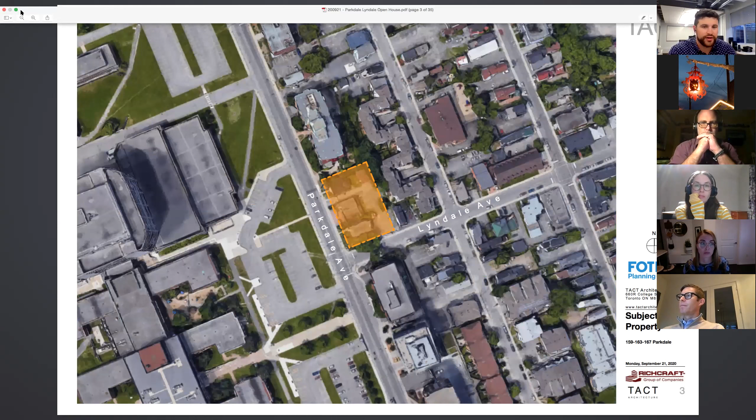Just looking at the existing context of the site, it's at the northeast corner of Parkdale and Lyndale Avenue in the Mechanicsville neighborhood. Just to the west is the Tunney's Pasture federal employment node, and it's roughly about 400 meters from the Tunney's Pasture transit station. So the current aerial imagery actually shows 3 buildings, but what's actually on the site now is a vacant lot. Those buildings have been demolished.

You really see a variety of built form in this area. You have quite a few mid to high rise buildings, whether it's residential along or near Parkdale to the north and south of the site, as well as to the west, you have some federal office buildings that are quite tall as well. To the east, you have a little bit more of a stable, low rise neighborhood that is really the center, the heart of Mechanicsville.

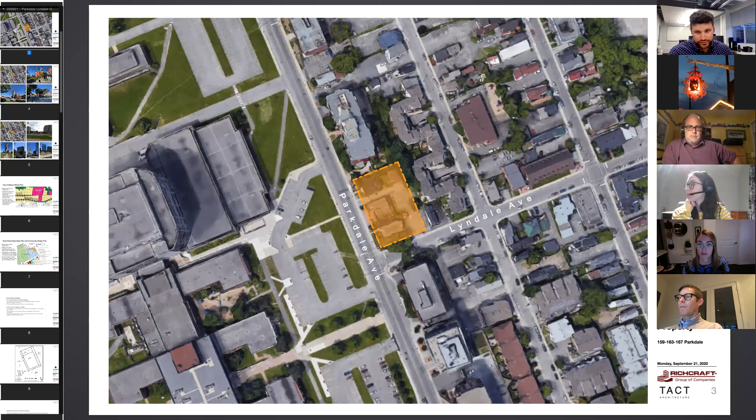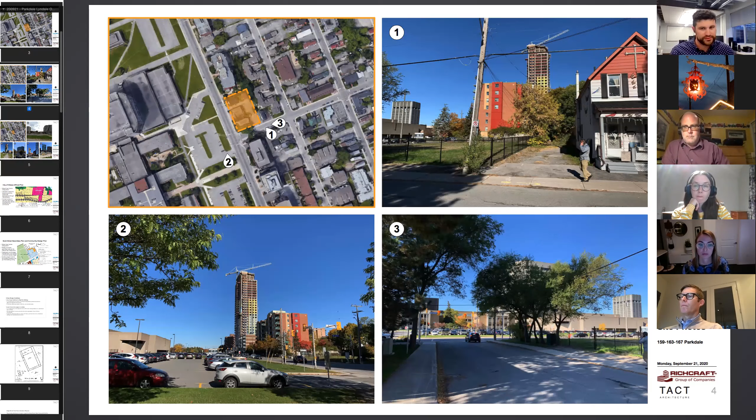So just looking at a few site photos, there's just a few examples of existing or planned high-rise developments, including on the next slide. It just goes to show that what we're proposing is not necessarily out of context with the rest of the neighborhood. This will not be the first high-rise development in this area.

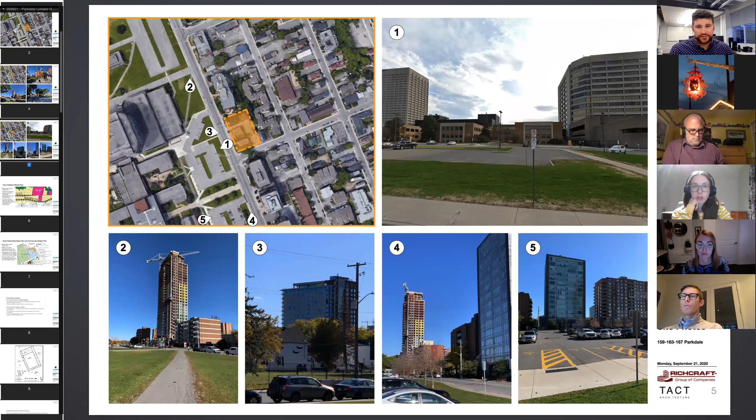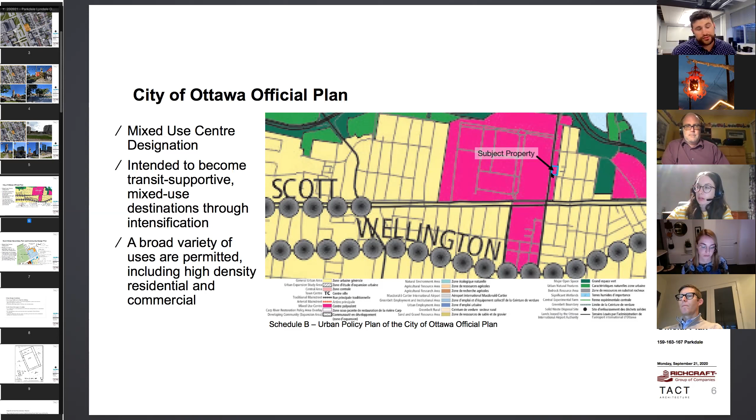In terms of the existing context, looking at the official plan, it's designated mixed-use center, and you see that usually near rapid transit stations. It's really to encourage these areas to become transit-supportive mixed-use destinations. So they often advocate and encourage for a higher density and a greater mix of uses, and they do often encourage intensification. In mixed-use centers, a broad variety of uses are permitted, including the ones that we'll be proposing, which is a high-rise residential building, as well as some commercial ground floor space. Again, it does promote high densities in this area.

With respect to the Scott Street Secondary Plan and Community Design Plan, again, mixed-use center designation advocates for a mix of uses and a pretty high density in this area.

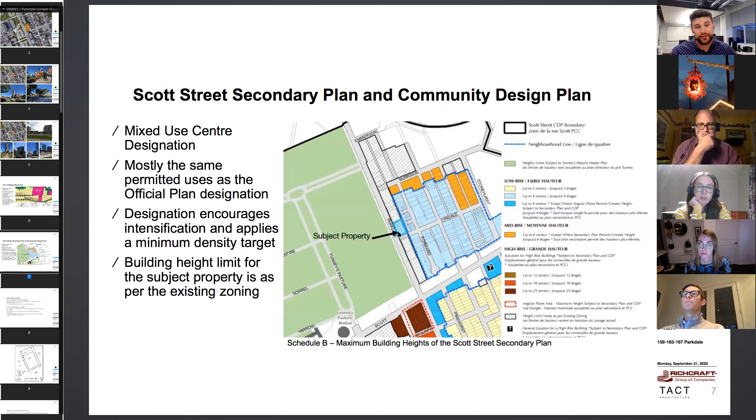It does include some minimum density targets. Just to note, the building height limit for the subject property, the secondary plan does speak to this, but it only says that for this property it is as per the existing zoning, which we'll note in a couple of slides. We've had regard for a variety of urban design guidelines to make this building as appropriate as possible for the site and surrounding context.

This includes some design guidelines in the community design plan, as well as other guidelines issued by the city, such as urban design guidelines for high-rise buildings, as well as transit-oriented development guidelines that speak to a variety of considerations we've tried to incorporate in this building design.

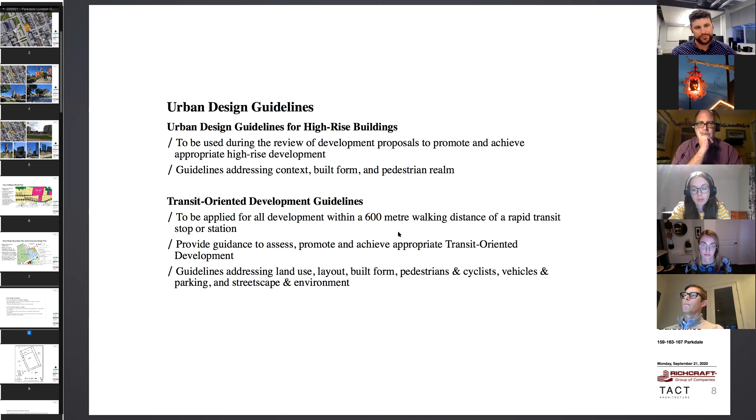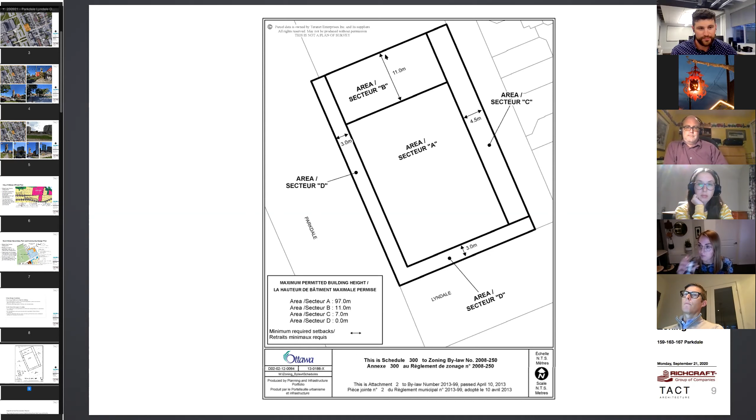Area B, which is 11 meters wide, you can only build up to 11 meters in height, so as to give some separation between the proposed tower on this building and the 8-story apartment building just to the north. We've also gone through the Urban Design Review Panel.

This is a group of architects who evaluate important development proposals for their design in the city of Ottawa. We've already gone through an evolution of the design. And as Councillor Leiper has mentioned, this is a site plan control application, so we're really going through the nitty-gritty details of this development proposal.

We submitted back in July and just received comments back from the city, a first round of comments. Over the next few months, just to give everyone an idea in terms of timeline, we'll be working with the city to resolve all of those remaining comments. Once those are resolved and we're able to enter into an agreement with the city, then at that time Richcraft will be able to get some building permits issued in order to construct the building.

So that's kind of where we're at in terms of the policy. Again, we're meeting all of the policy and zoning that currently applies to the site. This is strictly a site plan proposal. So with that in mind, I'll pass it off to Prish to speak a little bit more to the building design.

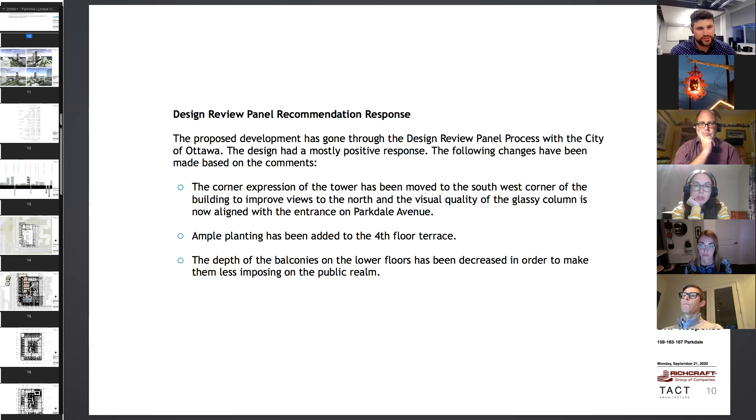Thank you, Nico. Thank you, Councillor, and thank you to the residents that are here tonight. I'm going to go fairly in detail, but fairly quickly. If I've left anything out, please ask me during the Q&A at the end of the session. My name is Prish Jain, I'm the principal of Tact Architecture.

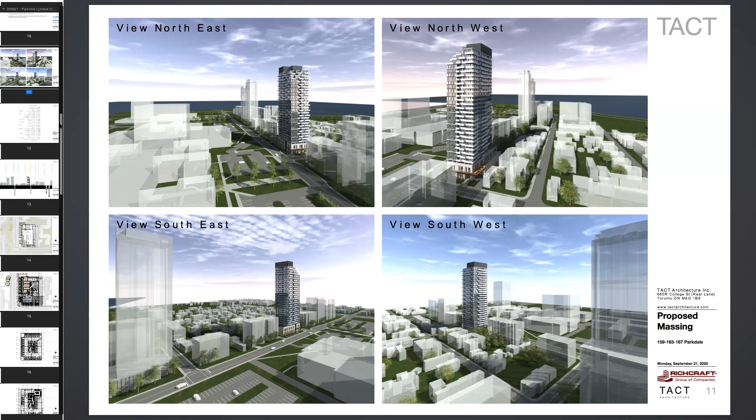We're a firm that specializes and focuses exclusively on residential, mid-rise, and high-rise buildings. We've won numerous awards, and this is our third project in Ottawa. We also did the Minto Beechwood project that finished about a year and a half ago.

This first slide shows typical views we prepare to provide a general context of the building from all four different angles. Top left is a view looking towards the northeast. Parkdale is in the foreground, Lyndale is here, the river being at the top towards the north. Top right, this is a view looking northwest, Lyndale in your foreground. Bottom left, this is a view looking southeast.

This is Parkdale, existing building under construction, nearly complete, Lyndale along here, and then Scott Street back here. Bottom right, a view looking southwest, existing building again nearing completion on the right, and then Parkdale behind the buildings in the mid-ground.

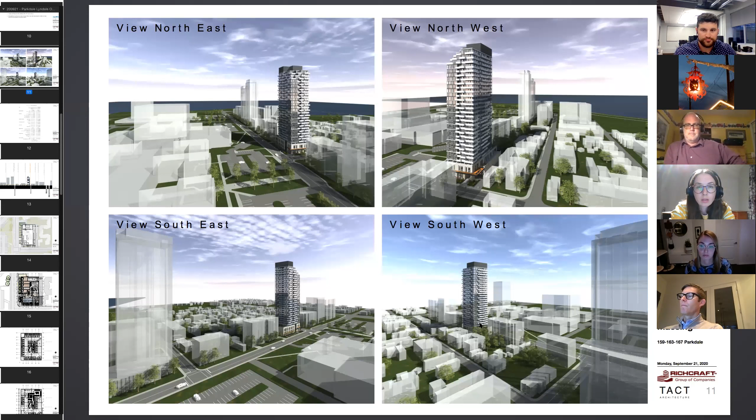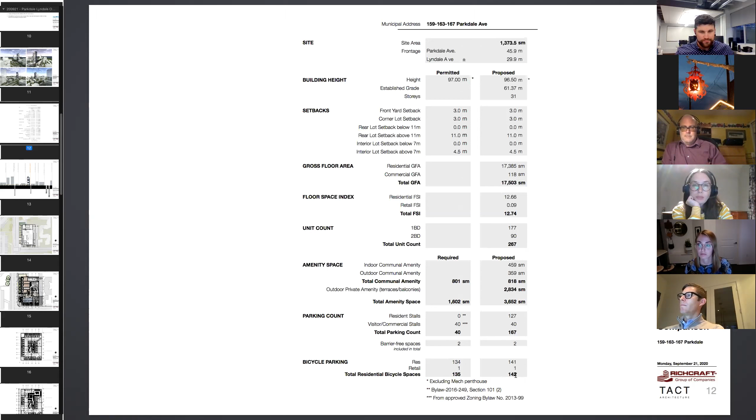I don't mean to go over too quickly, but I will come back to this if anyone has further questions. Moving along, this is a streetscape diagram that we typically prepare.

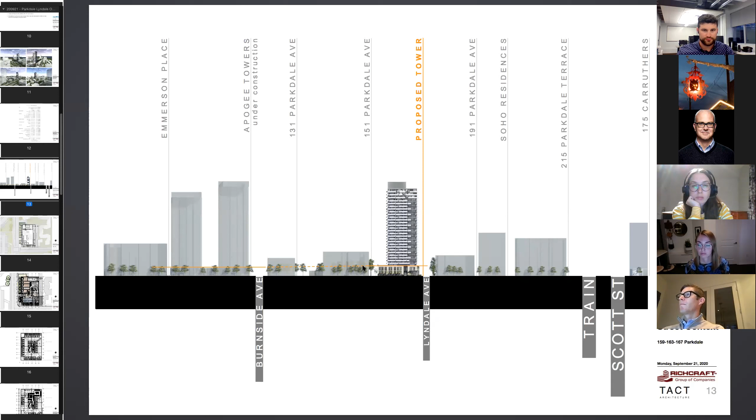This is showing a streetscape along Parkdale looking east. Scott Street would be here, the new train station, the train line along here, and the existing buildings shown in gray. The proposal shows new buildings under construction, and the orange line stipulates a new datum, or podium height wall, to which existing and proposed buildings are to conform.

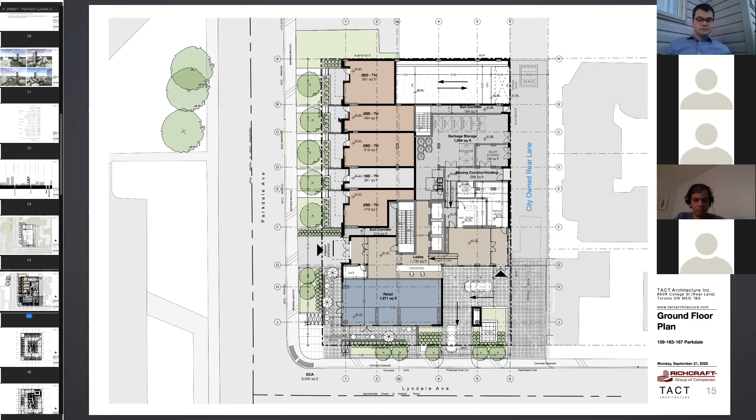There's a private terrace, a planter, then a boulevard, and then the sidewalk, with privacy and a grade change between the sidewalk and the private terraces. Moving further south, this is a pedestrian entrance into the lobby from Parkdale Avenue. At the corner is approximately 1,300 square feet of retail space with an adjacent patio towards the west and south. The retail space can spill out onto the patio, which is buffered by a landscaped area, then the sidewalk, then the street.

Similarly, on Lyndale there's retail, then a patio, a planted area, the sidewalk, and the street. Moving further around the building, there is access into the city-owned public lane. From that lane, there is a single one-way access around for vehicles to drop off and pick up.

This works through an additional through-lobby condition—a double height glass space. Pedestrians can walk in from one side, or through a vestibule as they're dropped off or picked up. They can walk through the vestibule and into the lobby from the rear of the building as well. A concierge sits in the middle, with eyes on the rear, the front, and the center portion of the building.

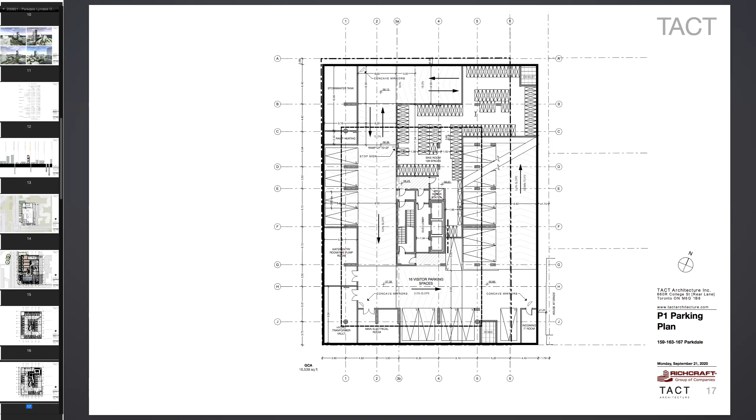The P1 level has all of the bicycle parking accommodated at a very convenient location near the bottom of the ramp. It also has all of your mechanical areas, stormwater tanks, fire and water pump rooms, transformer vaults, electrical rooms, and IT rooms. So P1 level is generally less efficient in terms of parking, but that's because it accommodates many other uses that are required to be as close and easily accessible by the occupants as possible.

Moving up the building, second floor. These are the upper levels of the grade-related two-story suites. These two-story suites also have access from within the building, from the second level, accessed by the elevators and through a corridor.

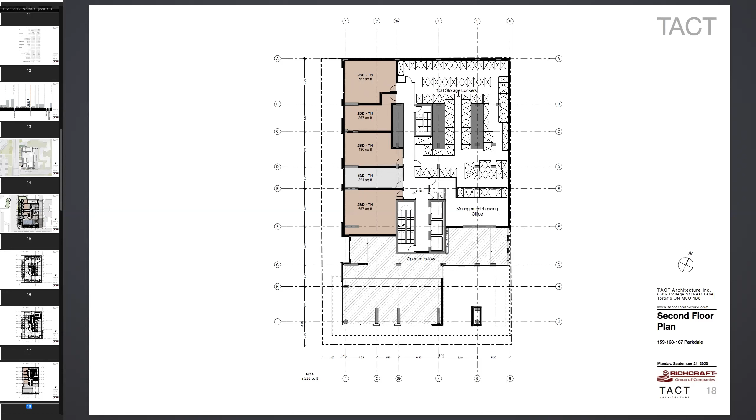What's also located on this floor, as a requirement, are storage lockers. These are separate from bicycle storage, for occupants and residents of the building. The area shown here with the angled lines is a double height space, open to below. This is the lobby area, which is glass on both sides and around the corner. And then this is the retail space, which is also a double height space. I'm going to have some images to show you in a few slides.

This is the fourth floor, and this floor is entirely dedicated to amenity space. This floor is set in from the podium below on all three sides - set in from Parkdale, from Lyndale, and from the east. On the north side, the outdoor amenity area is located contiguous to the indoor amenity area.

The programming and design of all of this amenity area is still being resolved and fine-tuned, but the amount and location of the amenity area is as we are showing it here. There's a pool, some outdoor seating areas, lounge chairs, and all access directly to the interior area via a series of doors or connections that would bring it into the inside areas.

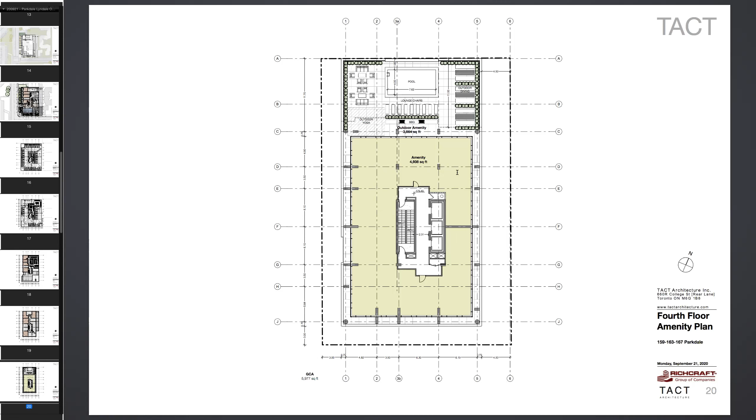Now, the top three levels are what we're calling the penthouse levels. The building on the top three levels starts to step back at the southwest corner, creating a terracing condition, which I'm going to show you in a minute, in terms of how the building recedes and steps away from the corner as it gets to the mechanical penthouse.

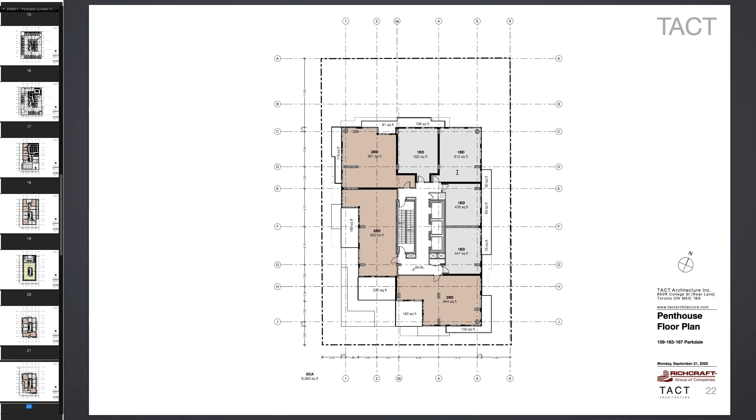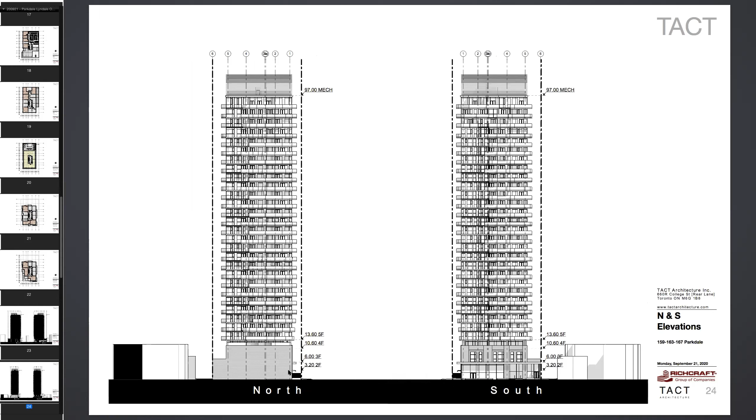North and south elevations. Again, here you see the height restrictions for different components as per the height map and as per the zoning that was previously approved. All of this conforms to that zoning approval from many years ago.

This is a more detailed elevation along Parkdale, showing the materials and coloration of those materials as well as we can do it at this early stage. We are showing here a raised private planting, a raised private patio area separated by a planter, separated by a metal gate for each individual entry for these 2-story suites. There would be a wood or wood-look canopy located more intimately closer to the ground plane at this location.

The third level, which would be here, this is the pedestrian entrance to the lobby. And then this is the double height retail space with the patios spilling out on the west and on the south side.

In terms of what the glass railings are made out of, although they look very solid here, it's hard to emulate what it is exactly that we're trying to show, but these are actually glass balconies that have a fritted pattern on it. This fritted pattern will obscure whatever is placed on the balcony, so people from the street will not be able to see it, and it also creates some privacy for the occupants within the building as well.

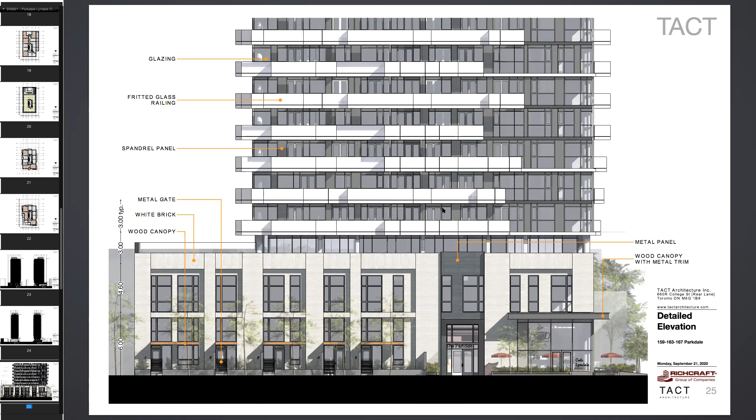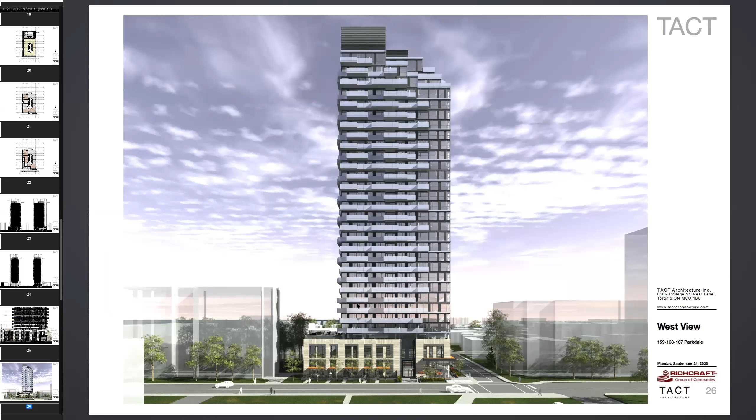A view zoomed back further, showing the entire building. Here you see how the top 3 stories step away as you get taller, moving further from the south and ending in a mechanical rooftop, where we like to incorporate the mechanical design as part of the building instead of just adding it to the top. Here you see the outdoor amenity area located at the north side of the building.

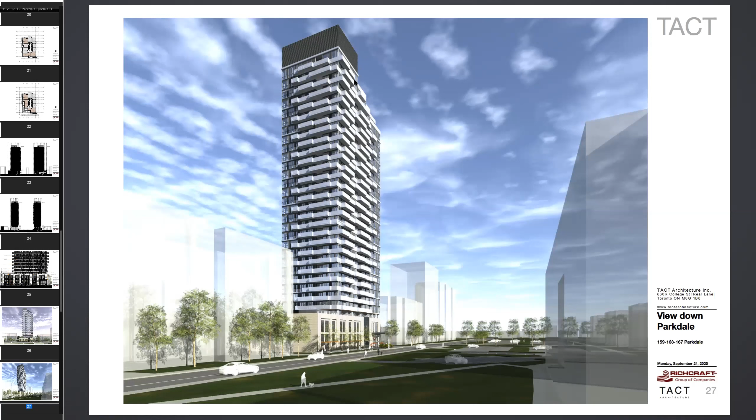Another view looking southeast, with Parkdale in the foreground. We're trying to create a very rhythmic pattern of fritted glass balconies so that the building is more articulate than normally. Again, the building steps back from the south side as it gets to the top.

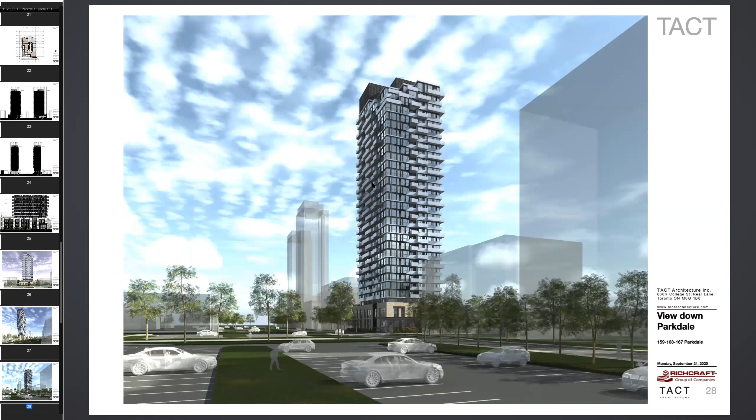View looking northeast. Here again, you see the 2-story retail space at the bottom of the building. One comment from the Urban Design Review Panel was that previously we had balconies on this corner, and the panel suggested this corner be free of balconies, with the balconies placed elsewhere, in order to lighten the corner up for the podium from a street scale perspective.

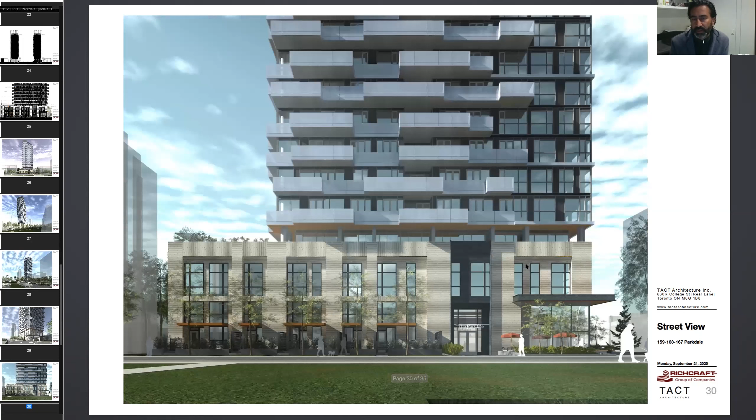Another view of Parkdale, looking south. This is a view along Lyndale. This is the access to the public lane, and then the drop-off pickup area.

Another pedestrian door for the drop-off pickup area leads to a vestibule, leading into a lobby. Drop-off pickup vehicles will then exit back onto Lyndale in a one-way direction and then back out onto Parkdale or to the other side.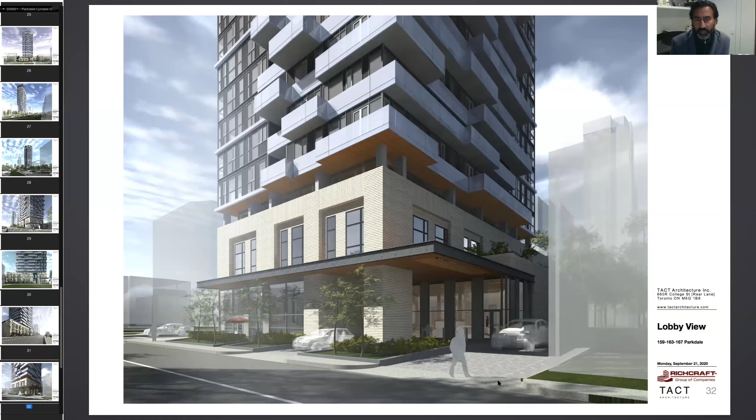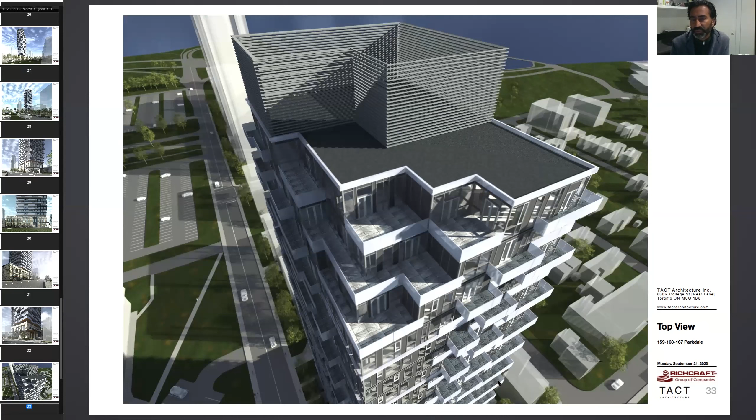I think this is the last slide. The top of the building, again, showing the articulation as the building recedes up towards the horizon. It starts to step back towards the mechanical space.

This is a section taken through a typical condition: Parkdale, the sidewalk, the walkway or planter, a few steps, a private planter, a terrace area, a front door, and then the two-story suite.

So again, that's shown here. This shows how the front door is not at the level of the sidewalk. It's slightly raised, very comfortable, 2 or 3 steps, but there's also internal access for this two-story suite located off the corridor from the 2nd floor.

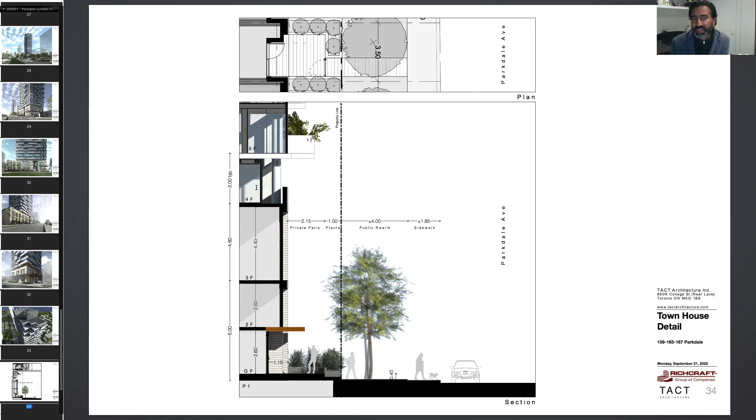The amenity space located here on the 4th level, again, recessed in from the face of the podium and the face of the tower.

That's it. Thank you. And I need a glass of water.

Okay, yes, so for context, I live across the street, so I'm quite concerned about traffic and trucks and cars and whatnot. My question is, where are the moving trucks, delivery trucks, any type of vehicle going to be situated for move-ins, move-outs, deliveries, etc., considering that Lyndale has zero room for any of that right now.

Similarly, somebody is going to ask about how garbage is handled, and I didn't address that in my presentation. All the garbage for the building is collected and stored internal to the building. On garbage day, trucks would stop on Lyndale, bins would be rolled out in advance at the end of the lane, garbage bins would be picked up, and then the bins would be rolled back and stored internally. Bins are never expected to be located outside on any permanent basis.

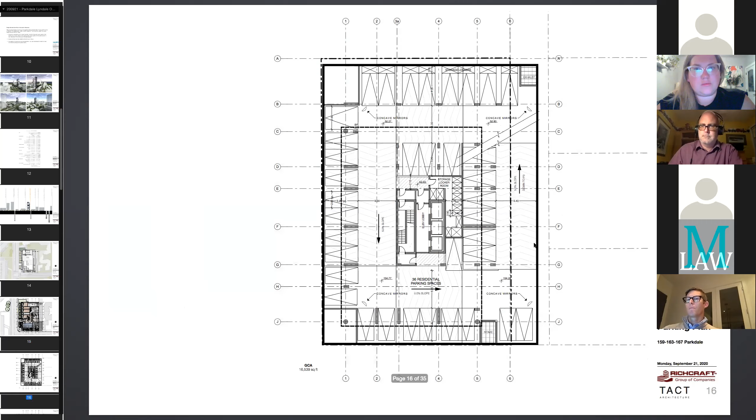Okay, next question from Vicky. We talked a little bit about construction, but do you have any high level idea when you might start construction?

Kevin, do you want to address that one? Yeah, sure. Ideally we'd like to go through this site plan process and complete it this year. In the meantime, there's a lot of coordination with neighbors, the architect, working drawings and details, as well as utilities, specifically hydro. So there's several issues to work through, but the ideal time for construction would probably be May or June next year.

The duration for a building like this would typically be about 2 years or so, maybe a bit longer. Prish, you might have a better idea of this scale of building. We've built buildings of this size when it comes to units and square footage, but we've never gone to 30 stories before. So Prish, maybe you can talk about your estimate of timing for construction?

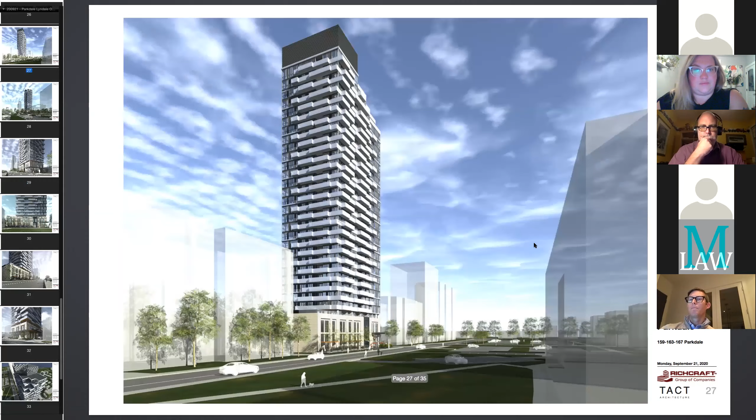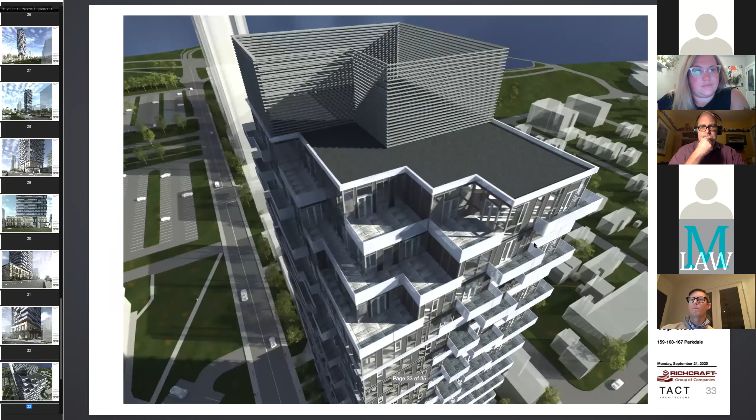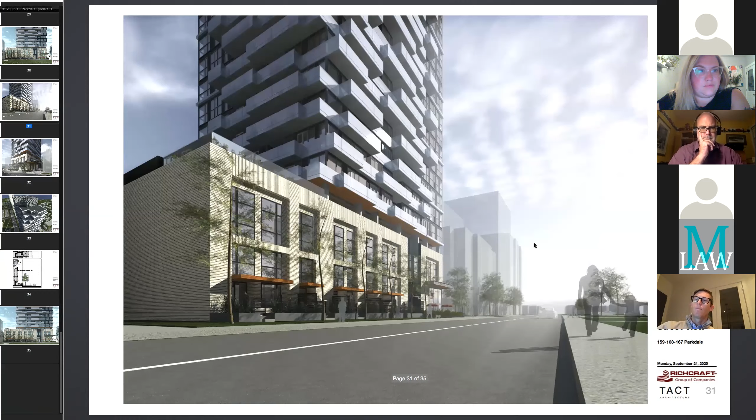So this area here, even though 4 meters of it has a below grade component, I would estimate there would be some requirement for closure along Lyndale, or at least along Lyndale, and maybe even both Lyndale and Parkdale. But I'm not the expert in construction staging. Once you get out of the ground and the ground floor slab is poured, the 6 meter wide area of the lane can be utilized for deliveries and staging, taking the onus off of Parkdale and/or Lyndale upon completion of the below grade component.

Yeah, getting out of the ground is the most difficult. Once the project emerges out of the ground, the next most difficult is the podium, from 1 to 4. Then once you get to the 5th floor and up, it will be smoother sailing all the way up to the top penthouse levels of the building.

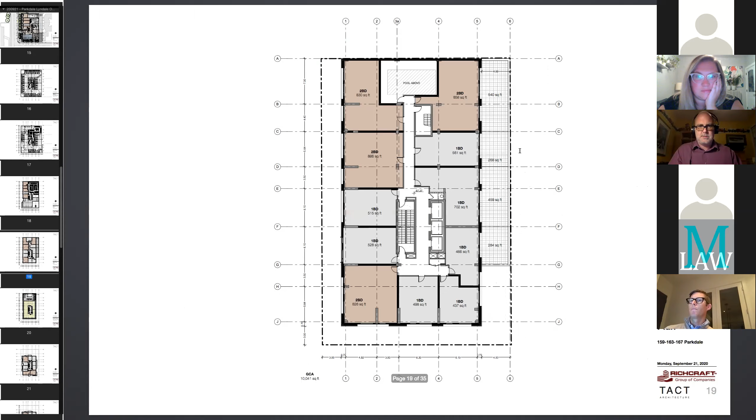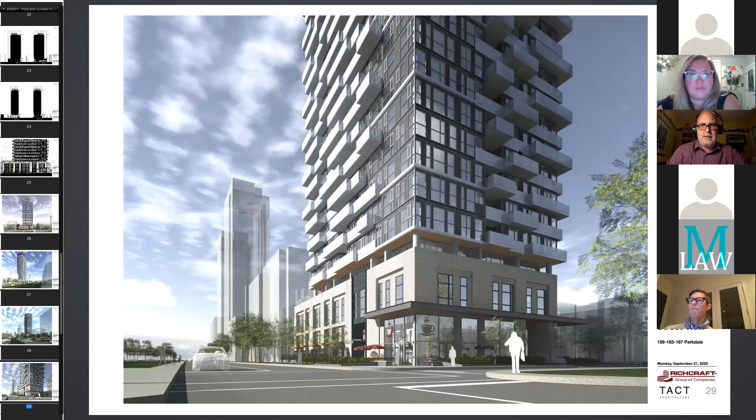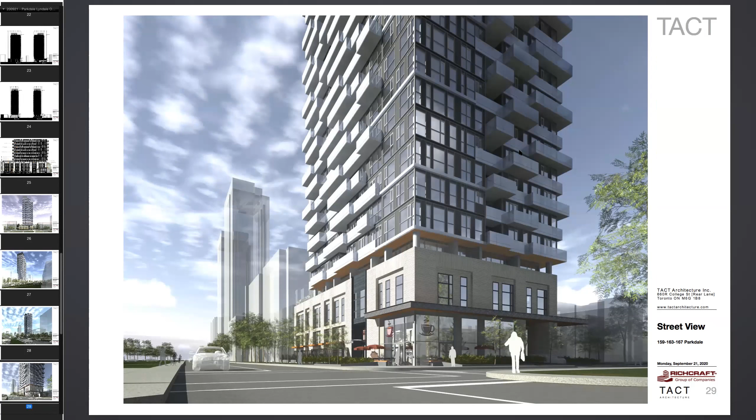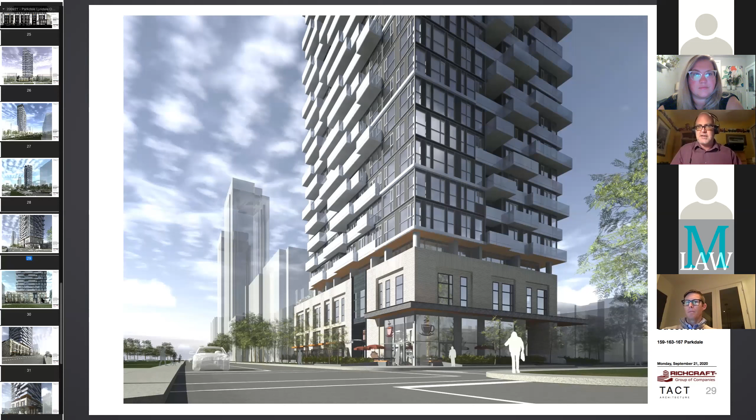There we go, that's great. So, and I'm sorry, I'm not an architect, obviously, but this is a little better looking than most of the buildings being proposed for particularly Scott Street. I know at the last planning committee meeting we had a discussion about the building on Albert, Claridge's building, I think. It kind of wowed the planning committee with respect to the more distinctive architecture. We raised the Claridge building as something that was shown really distinctive, and then became something less distinctive once it was actually built.

On Albert, the planners were able to describe what made the building distinctive. I think they spoke to the curvilinear windows and stuff like that, and they hinged the site plan to that. They actually hinged the zoning to that, but they wanted to see a site plan that had the same features in it. I'm wondering what kind of commitment you can make, and maybe Jenny can weigh in with respect to site plan conditions that speak to this better architecture than what we've been seeing in the neighborhood. Forgive me if that's convoluted, I'm just not sure quite how to pose that. Is there a way to describe what we like about this architecture and then make sure that's what gets built?

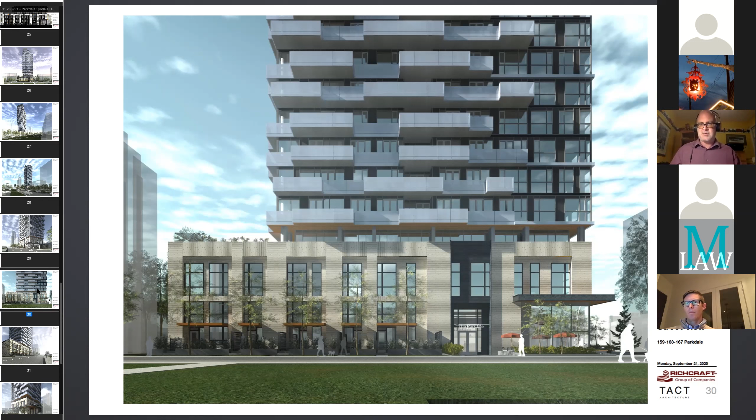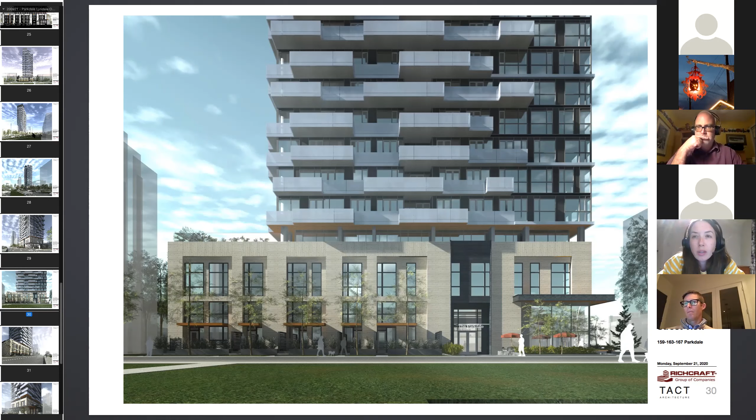I mean, typically we tie the approval to the elevations that we approve. In this case, I think the file you're referring to is Andrew McCreight's, so I can have a discussion with him to see what he's doing with that one.

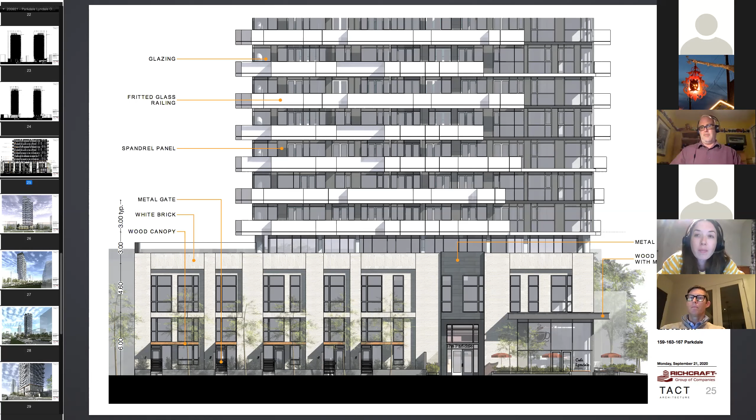Okay, and maybe we can do the same thing here. There's some interesting variation around it, and I just think it's a little funkier looking than most of the buildings. Yeah, I mean, we'd also have to work with Richcraft, because sometimes when they value engineer stuff it just becomes not feasible. So I'm hoping Kevin will agree to work with us maybe on a condition like that, so it doesn't get value engineered away.

I can just make a small comment on that as well. Because our firm focuses almost exclusively on residential architecture, I can say with confidence that all residential condominium driven buildings are always about the bottom line. Our mandate in our studio is to make sure the buildings we design aren't dressed up just to make them look attractive at the outset. We consider cost as we design, and we try to design as effectively and efficiently as possible from the get-go. So I'm not saying value engineering isn't a reality, it always happens, but we challenge ourselves to come up with a design that will be hard to value engineer. That's really our mandate, and it's proven successful for other projects we've completed, dozens and dozens, many of which we've won awards for, including OAA Design Excellence Awards. So we're confident that the combination of our design and Richcraft's reputation means this project will deliver.

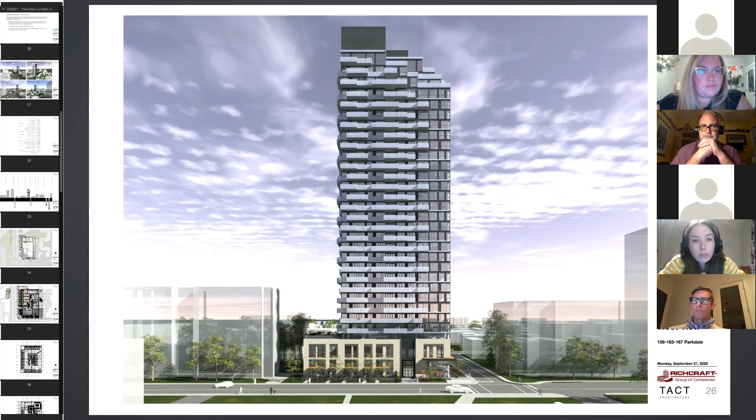I can answer, I could probably talk about aspects of both questions. First, with regards to the trees on the lane, I believe you're talking about the trees currently located in the 6-meter lane portion. The reason they're not in the report is because they're on city-owned property, within that 6-meter laneway area from this property line to this property line. So that's likely why they're not in the report. All the trees within the property owned by Richcraft would be within the report.

With regards to the venting and the exhaust, it's perhaps not an answer that people want to hear, but having designed dozens of buildings in urban areas, this is what laneways are for. You cannot exhaust, you cannot use the front of the building either on Parkdale or on Lyndale to perform functional or mechanical type requirements, because those are the public faces of those buildings. Laneways are for servicing the building. They are for access, for utilities, for mechanical. That's what they're there for. 6 meters is a 20-foot separation. It's quite typical even in the city of Toronto.

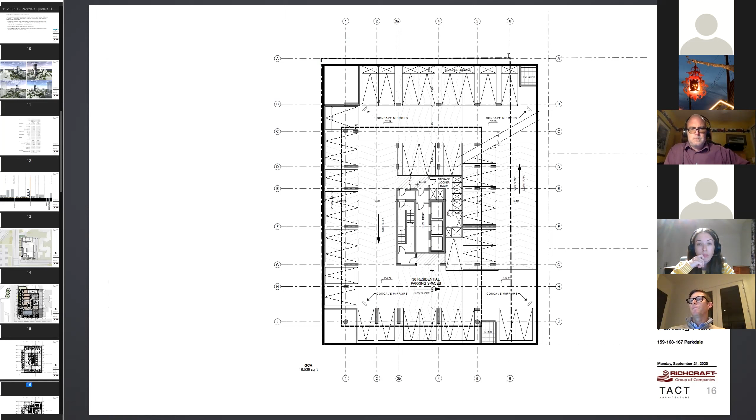And then how many levels of below-ground parking will there be, and number of cars per level? So I can answer that. There are a total of 167 parking spaces spread across 5 levels. 4 of those levels are typical parking floors that look like this, and I don't know the exact count, but 36 parking spaces per level on 4 levels. Then on 1 level, which is the P1 level, there are fewer, there's 16. So 5 levels total, 36 on 4 of them and 16 on 1, and that includes the barrier-free spaces as well.

Okay, thank you, next question in the queue. I note that your plan values privacy to townhomes in Parkdale by adding trees, but how about saving privacy of Muse residents with existing laneway trees on the east side? Is there a precedent for cities selling out laneways to developers?

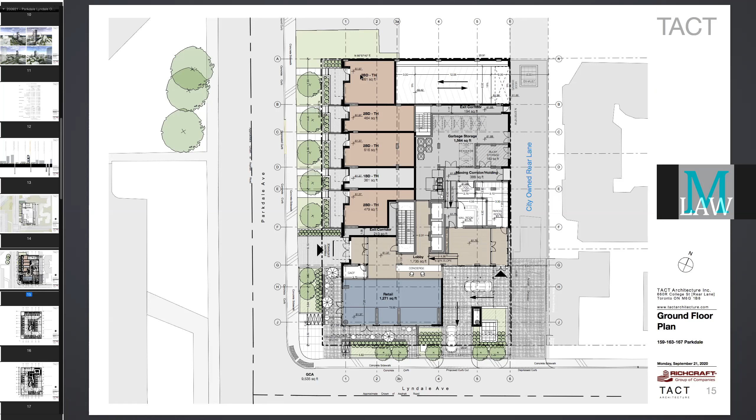You might be muted. He's unmuted, but we can't hear you. Joshua Foster, that's who it is. Yeah, we can't hear them. Yeah, it is Josh Foster. So if there's an audio problem, then Prish, why don't you go ahead and say what you were going to say?

I was going to speak to the exhaust. The parking garage is required to have an intake and an outtake for air. And the intake and outtake, they don't run continuously. They're on either a timer or they're on a device that measures the air quality and moves the air accordingly. So it's not a condition that is on continuously. It's a condition based on how much the parking garage is used.

So let's say during the peak morning or the peak evening, that's when the exhaust or the airflow will be at its peak. During the night and or during the day when there's less movement within the garage, there's less reason for the airflow equipment to kick on. So that's my non-engineer answer with regards to airflow, intake, and exhaust.

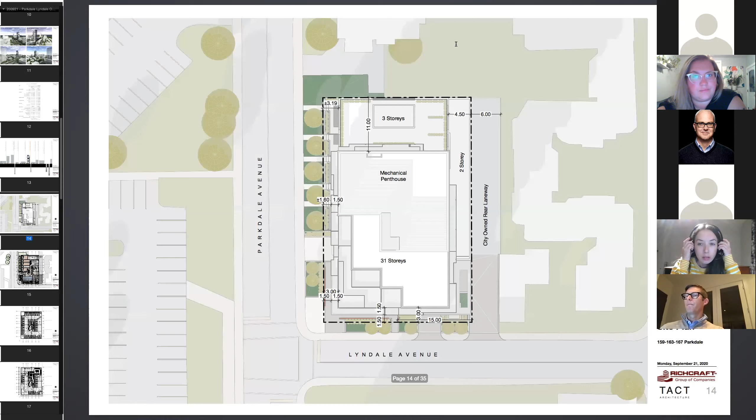My understanding is that there's 40 visitor parking spots, and they're going to be in the underground parking. That's in conformance with bylaw and typical of the city of Ottawa for these types of buildings.

I was just taking a closer look. The visitor parking is typically located in the most convenient location, which is as soon as you drive in, below grade. You can see them if you look carefully on the drawings - there's a V indicated on the parking spots, V for visitor. Wherever the visitor parking ends and the residential parking starts, there would be a security arm requiring a fob to access further into the lower levels. Typically, visitor parking is required to be as close to the bottom of the ramp and as conveniently located as possible. In this case, it's in P1 and likely P2 as well.

If I may add to what Prish and Andrew have said, the way the bylaw is written for this particular development, it will permit the visitor parking to also be used for parking for any commercial space located on the ground floor of the development. So the visitor parking would have two functions - for visitors as well as for users of the commercial space if they're coming by car.

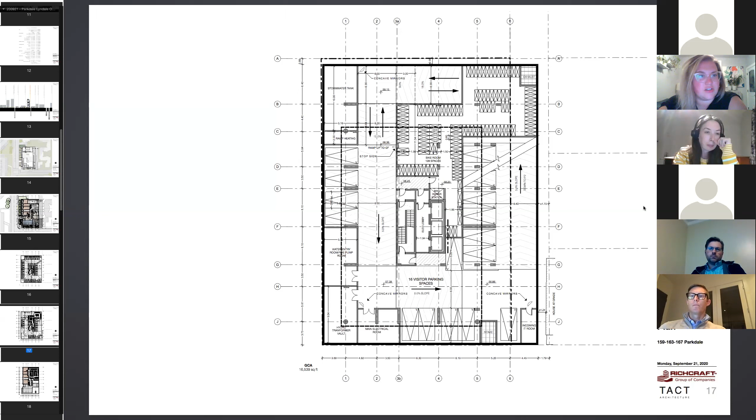With the significant increase in 1-bedroom units over the original designs, under current bylaws, can these units be used as investment properties for use as Airbnbs, which could increase noise and traffic?

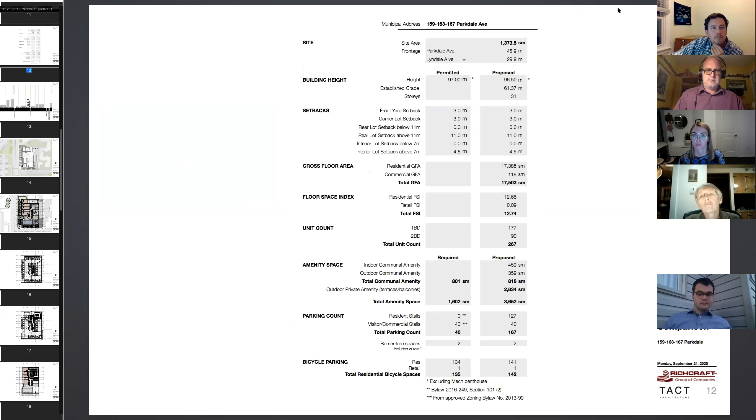I don't know where Jeff went. I don't know if he wants to comment on that or if the developer does. I am here - hey Fiona, I just turned the mute off.

It's a good question, but I don't know the answer. I don't know if Airbnbs cause extra noise or not. I don't know if Richcraft is going to own and rent all of these units, or if a purchaser is going to buy it and move in, or buy it and rent it out. These are strictly legal issues that the city can't necessarily police, but these are kind of beyond the scope of discussions for approving residential units. We're not necessarily here to discuss the end user, although maybe somebody has had a bad experience - you can't use that to paint every scenario the same way. So I can't answer that. And if the councillor wants to enact some sort of restrictions on the end user, he would have to have some sort of powers to do so, and I'm not sure exactly what those are.

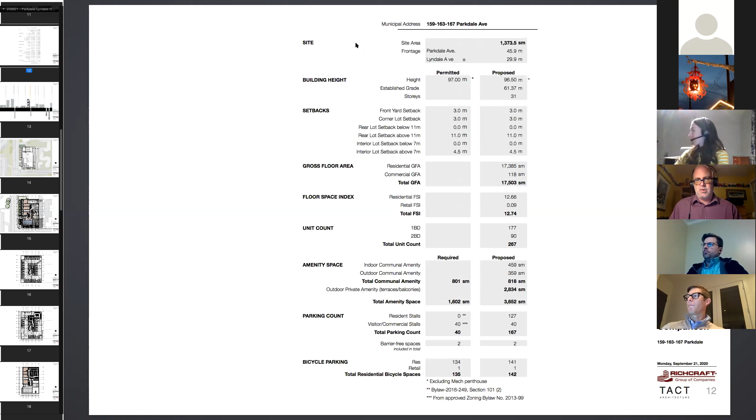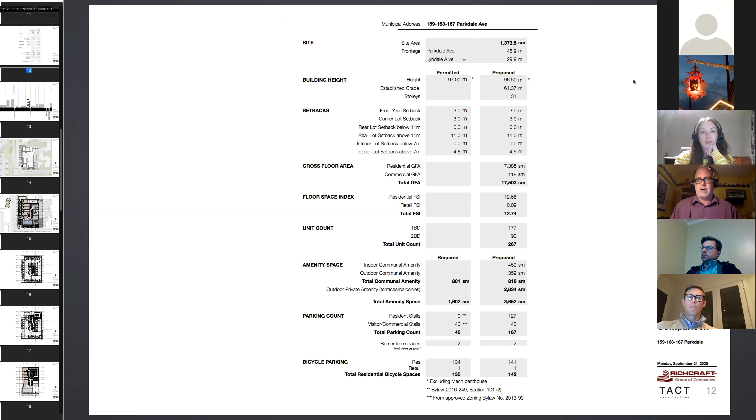Airbnb is now on the verge of being regulated in the city. But my understanding of what we did - I have to apologize to Cheryl particularly - they're not allowed unless it is your primary residence in residential zones. Is this an MC or a TM or an R zoning? I'm sorry, I should know that. The zoning here, councillor, is MC. So in the MC zone, we'd have to look at the specific MC to see whether or not hotel is a permitted use. If hotel is a permitted use, then the people who own these units could rent them out on Airbnb under the regulations that are coming forward. COVID has thrown a wrench in the works, but within months we would have to take a look at the particular MC zone this one is and see whether or not hotel is a permitted use.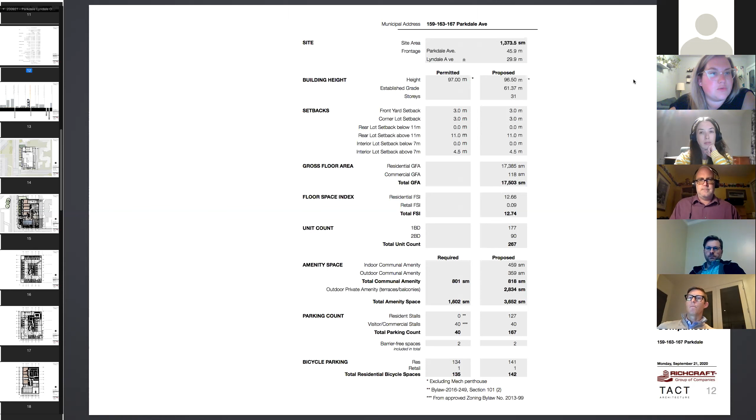Okay, thank you. Lyndale is often down to 1 lane in the winter and the sidewalks impassable, with wheelchair users forced to use the street to get to and from Parkdale. There are many mobility device users in this area. What is the developer going to do to minimize access issues on Lyndale during construction, particularly in the winter? Is there a plan in place with the city to address the snow issues once there are hundreds of new residents?

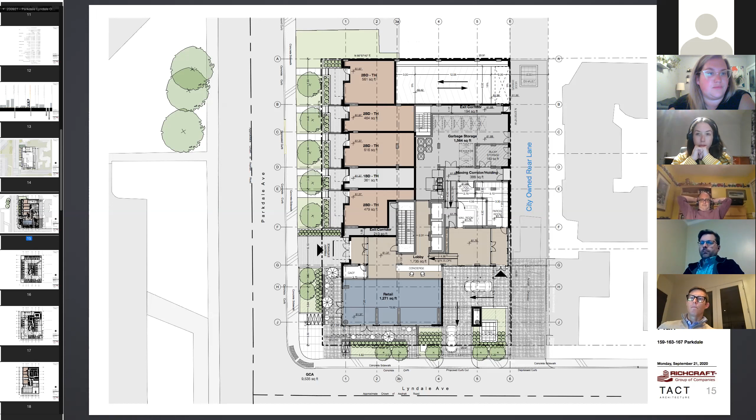I'll start on the transportation perspective. We are looking at some changes to the sidewalks on the frontage of the site alone. The responsibility of developers doesn't typically extend past their property limits, so we're working through that with the city right now to finalize.

With respect to construction issues, as we move towards final approval of the site plan and into construction staging, those plans will be developed and submitted to the city. That typically falls into my realm of responsibility along with the contractor. Maybe Jenny can talk specifically about snow clearing issues.

I'm not going to touch that one. No, it's not an issue that falls within the planning department's purview.

A couple of years ago, snow issues with respect to the hundreds of new residents became more and more important, particularly in rapidly intensifying neighborhoods like Kitchissippi. We, the five urban councillors, have raised it with the city year after year. We had a great session to yell at the city with residents about two years ago, and they took our concerns to heart. The sidewalk clearing last year was significantly better as a result of changes they made, including moving to 24/7 plowing and beginning to plow the sidewalks as soon as it starts to snow rather than waiting for a big buildup. It was also a very light winter, so we don't know if that was just a fluke or if the changes will be permanently better.

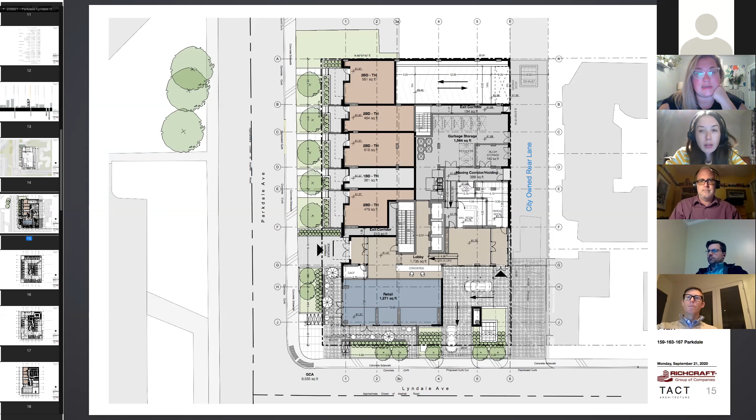Sure, I don't have a lot tonight. Thank you very much to everyone for participating. Some of the flashpoint issues moving forward are going to be: should the lane be used to extend the parking, bird-friendly glass, and I also want to explore whether there's flexibility on the venting. I want to take a look at the landscaping in the rear in order to take into consideration the privacy and quality of life for the residents of the Muse.